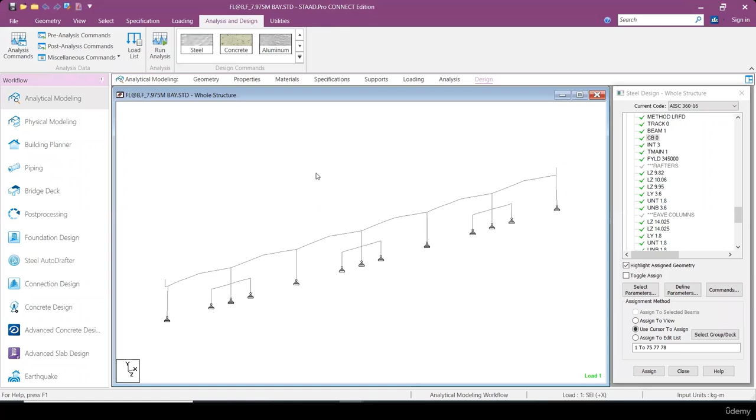Okay, so I'll start the session today. I'm sharing my screen. Just give me a minute. Okay. Fine. My screen is visible to all of you? Yes, sir. Okay, fine. Thank you.

So I'm creating a new structure. Let us take a rigid frame. Whatever the concepts, deflection criteria, effective lengths, design parameters, everything I'll use here and explain one by one. So I'm creating a new structure with the name rigid frame. Let me open one drawing also.

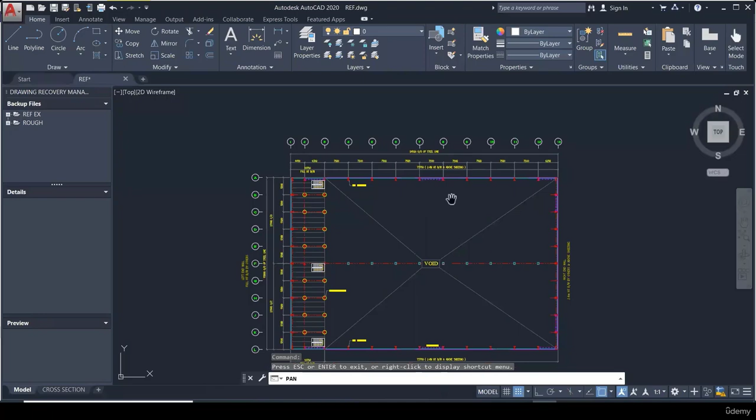One mezzanine is there. Since it is the first frame design, we are doing simple frame design only, so I'm not taking the mezzanine into account in this session. I am taking just a simple frame like this. Suppose we take an interior frame, the frame along grid line 8. That I have to design now.

So what is the type of frame? Can anyone tell? We have already seen different types of structures, and my plan is in front of you. So what is the type of structure here? Can anyone guess?

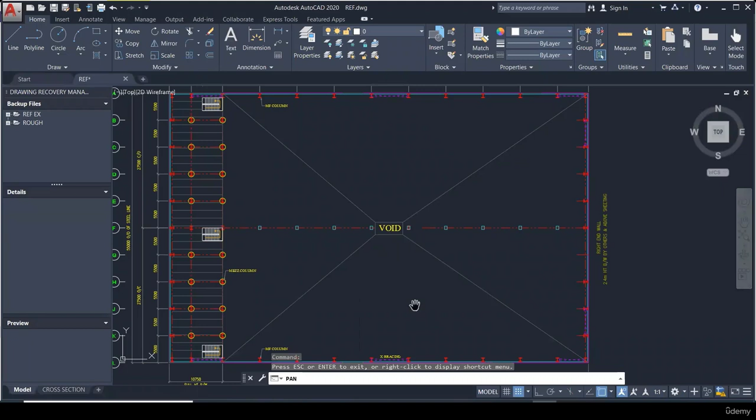One column here, one column here, one column here. So what is the type of frame this one? Already we have seen different types of frames. So can anyone guess? Dome structure. Sorry? No. Dome. Pitched roof. Yeah, obviously most of the PEBs are pitched roof buildings only. Okay, we cannot tell that by seeing the plan what type of structure it is.

No, actually, I am asking technically whether it is a rigid frame or beam column, like BC1 or BC2 or something. Yeah, type of frame I'm asking like that. BC1, sir. Yes, exactly. Perfect. This is BC1 because if you see there is one internal column here. So these two are mainframe columns, either sides, along this line and along this line. These are called mainframe columns.

There is only one internal column. Along one frame line, there is only one internal column. So this is called BC1 frame, beam column frame 1. This is the type of frame. So I'm taking a frame at grid line 8. Sir? Yeah, tell me. BC1 or MS1 are similar? No. Generally multi-span, if you see, you cannot tell by seeing this.

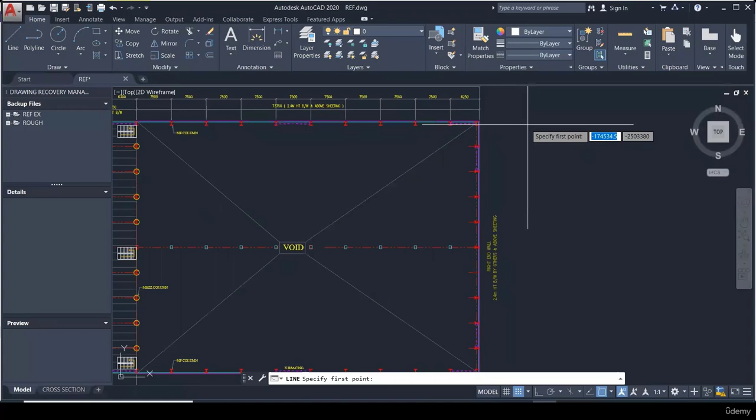Multi-span is a structure with multiple gables. Gable is nothing but a triangular portion. Let me take one line here so that you people can understand. So my BC column frame will be like this. The top of the BC frame will look like this. One column will be in between them, right? At this portion, one column is there. But if you go to multi-span,

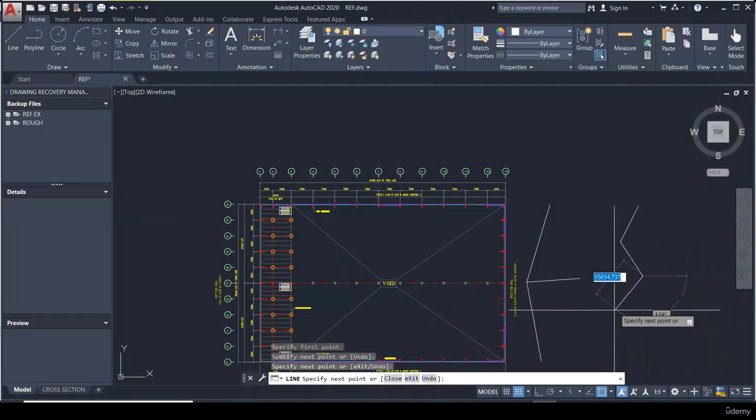it comes like this. Two gables. Multi-span or multi-gable are same? Yeah, multi-span or multi-gable are similar. Some companies will follow some terminology, depending upon the company. Generally the perfect terminology is that if there are multiple gables, the structure can be called multi-span. If there is only one gable and there are a number of columns, that is called BC frames.

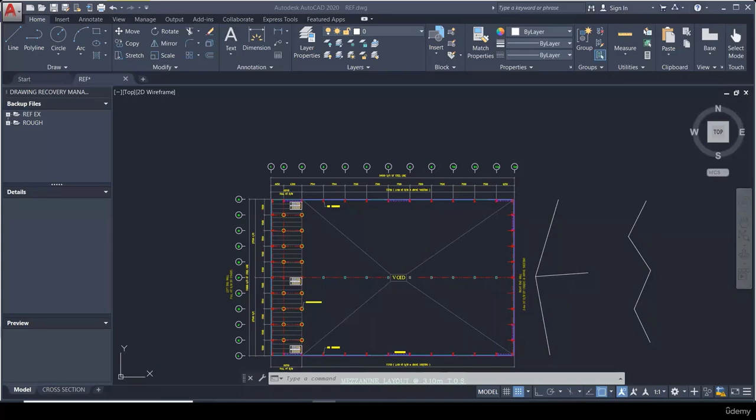Okay, fine. So I am taking grid line 8 as a BC column frame 1. So what is the width of this building? 55-meter width. And one more important thing: what is the tributary of this frame? Suppose I am taking grid line 8. What is the tributary, or bay width? 7.5. Yes, exactly. Perfect. Why is it 7.5?

This is the frame line we are talking about, right? I'll highlight it. So it will take half portion of length from this, half portion of length from this. Half of 7.5 goes to grid line 8, half of 7.5 goes to grid line 8. So half plus half comes to the full 7.5. So the bay width or load width or tributary of grid line 8 will be 7.5. Anyone have doubt in this?

No, sir. Tributary is the main concept while applying loads. If you take a lesser tributary, you'll get a lesser weight of frame. Obviously, if the tributary is more in practice, the frame is going to fail. So that is why tributary is the main portion while applying the loads. So the bay spacing, just tell me.

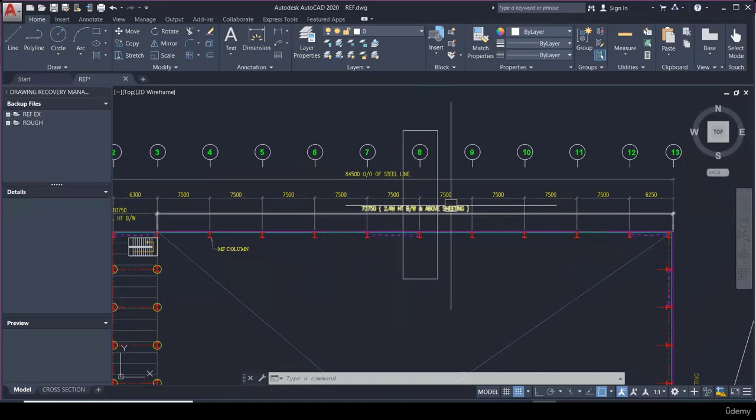Here it is 7.5 same, but suppose let us take this frame along grid line 3. Along grid line 3, one side bay spacing is 6.3, other side is 7.5. So you have to take the average width: 6.3 plus 7.5 by 2. Nothing but half of value from 6.3, half of value from 7.5.

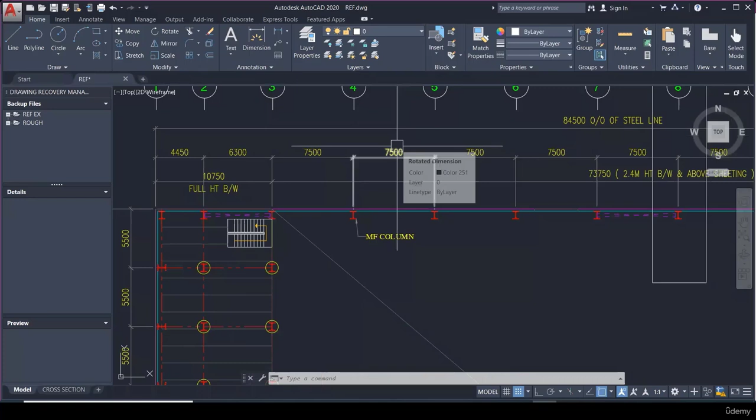And the question you asked is, if there are multiple changes in bay spacings, what value we have to take. If you have time, you can do one frame by one frame. It's your wish. But if you do not have much time to do each and every frame separately, you can take the higher value tributary frame and apply it to all frames. Is your doubt clear?

Yes, sir. Okay, if you have time, you can do each and every frame separately by taking the individual bay widths. But if you don't have much time and suppose your client is pressurizing you, you can take the higher side and apply it to all frames, but that will be uneconomical.

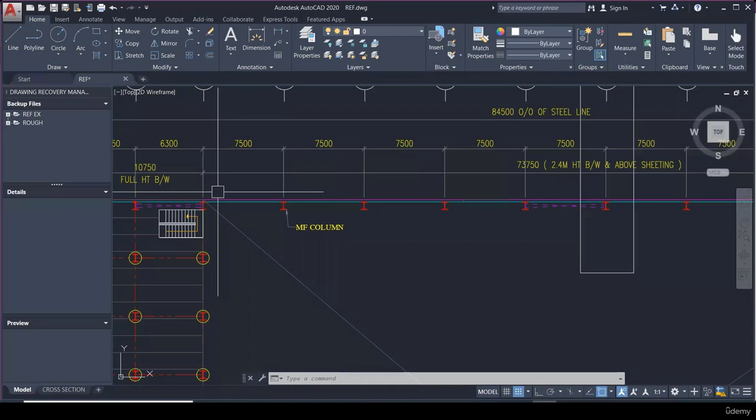Suppose here the frame width, the tributary is 7.5. Here obviously it is 6.7 or 6.9, something like that, right? So there is some difference, 7.5 and 6.9, almost half a meter difference in tributary. So loads will be less in this frame. That is why if you do typical to all frames, sometimes it will be uneconomical. So if you have time, better to go with individual frames.

Okay. So I'm taking grid line 8. Average tributary is 7.5 plus 7.5 divided by 2. That will give you the average tributary as 7.5. So I'm just mentioning here as a reference only. Just 7.5 meter bay. Rigid frame underscore 7.5 meter bay width.

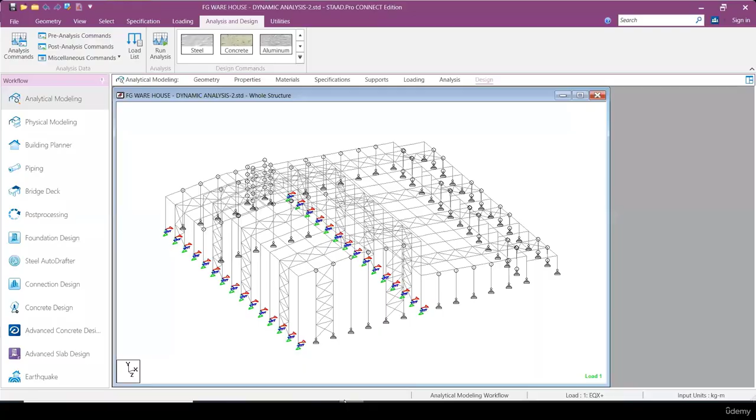Okay. So please check whether it is in English units or metric units. Whichever is feasible to you, you can follow like that. Generally we follow metric units only. So I'm creating the structure. Sorry, it has been closed.

I'm advising all of you, please use the licensed version if possible, because these are cracked versions. These cracked versions show some negative results while analyzing the structure, because some structures may pass in licensed versions, but these structures may fail in cracked versions. So please be aware while using cracked versions. It is better to use the licensed version only if possible.

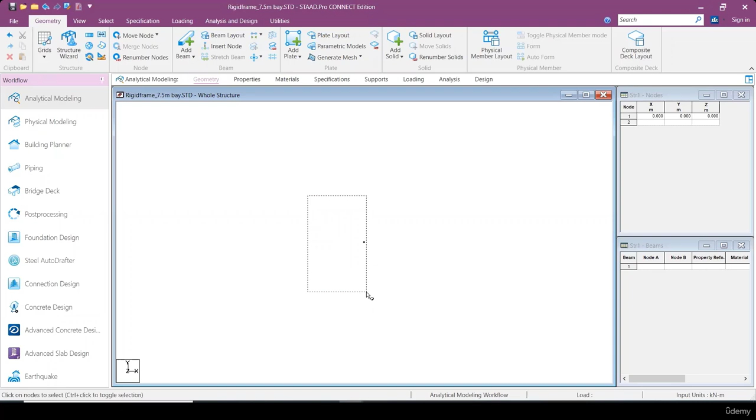So I have created a structure. I'm creating an initial node at origin. I'm taking front view as reference because I'm doing a 2D frame only. We have to increase our learning step by step. Already we have done beams. We are doing now frames, and then we'll see space frames. Like that we'll increase our standards.

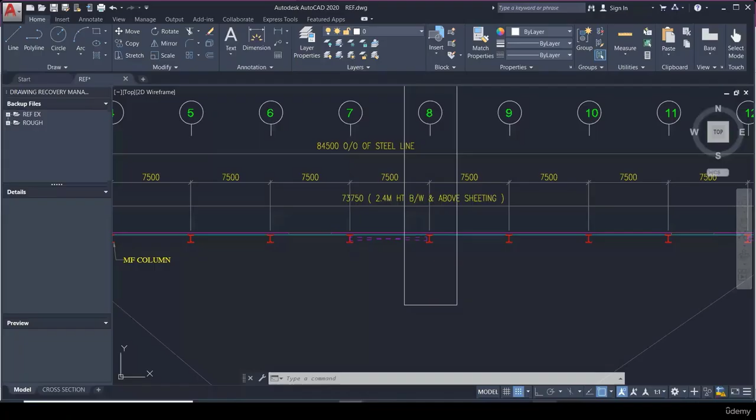So first let me copy this node to some width. What is the width of the building here? The frame is in this direction, right? So what is the width of the frame? You can see it is 55 meter. But in this 55 meter, 200 will be taken by block wall on either side. Generally STAAD will take center to center dimensions only. That is the main point you have to understand. So while giving the width in STAAD, you have to give center of this column to center of this column. That is why the overall width is 55, but we should not give 55 in STAAD.

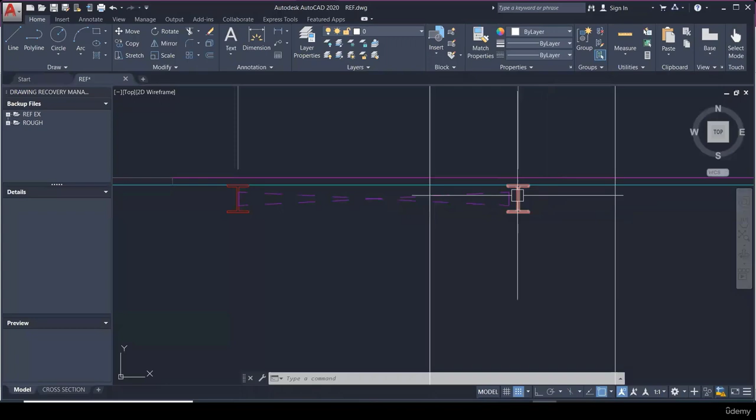Because the 200 block wall is going on both sides, while giving the center line, you have to give your assumption. Suppose the base depth of the column is 300 mm. So I have to neglect 0.15, because I have to give it at the center line in STAAD. So 200 plus 150, 350 on one side. This side also 200 block wall plus, assuming 300 overall depth of column at base plate, the center line will be 150. So 200 plus 150, 350. So 350 on both sides.

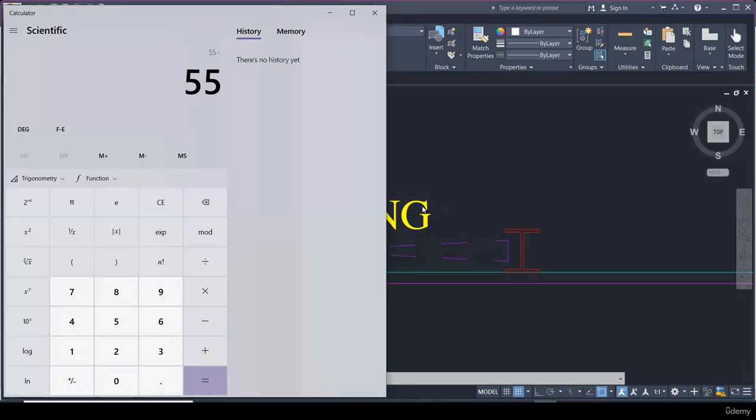So 55 minus 2 into 0.35. So how much do we have to take in STAAD? 54.3 only. All of you agree with me? Yes, sir. Clear. So I'm giving 54.3 only in the x direction.

Sir, I have a doubt. Yes, tell me. Sir, for this column I have assumed the depth is 300. Sometimes its depth is more than 400, 450 like this. Yeah, probably it may go. You have to shift this point after the design if you want. No problem at all. After the design, if your design has passed, and if there is any change, you can shift this node to whatever the actual dimension is.

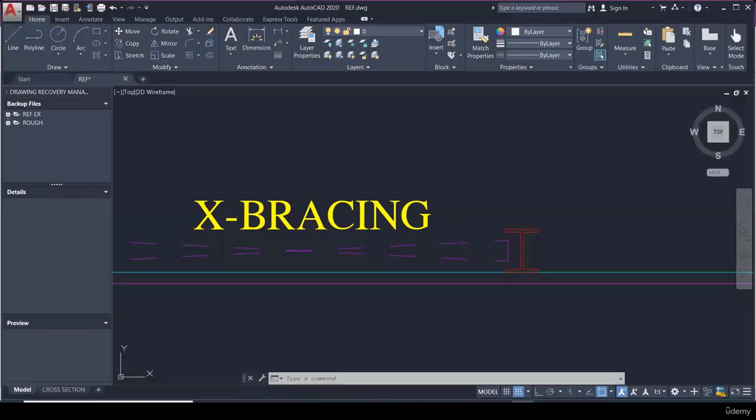Okay. So these two are sidewall columns. I have one middle column also here. This is the column, at half distance. So actually 55 by 2, if we take the middle of these two columns. But I am taking here 54.3 by 2, right? So 54.3 divided by 2 is 27.15.

27.15. So these two are mainframe nodes for mainframe columns, and this node is for the BC column. So we have created nodes at the base. Now we have to project columns and then rafters. So what is the height of the building? For that, I'm going to take the cross section.

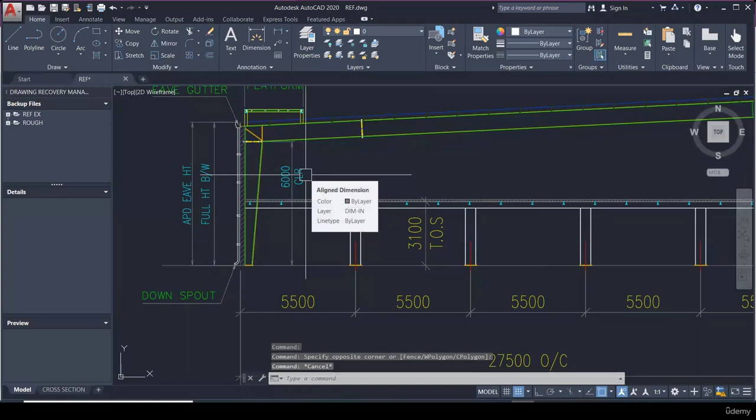Okay, so this is the cross section. In my project they have given it as 6 meter clear. Sometimes the customer will give clear height, sometimes the customer will give eave height. Eave height is nothing but the top of the eave strut. This is the C section you are seeing, right? I have highlighted it here. This is called the eave strut. The bottom of base plate level to top of eave strut can be called the eave height.

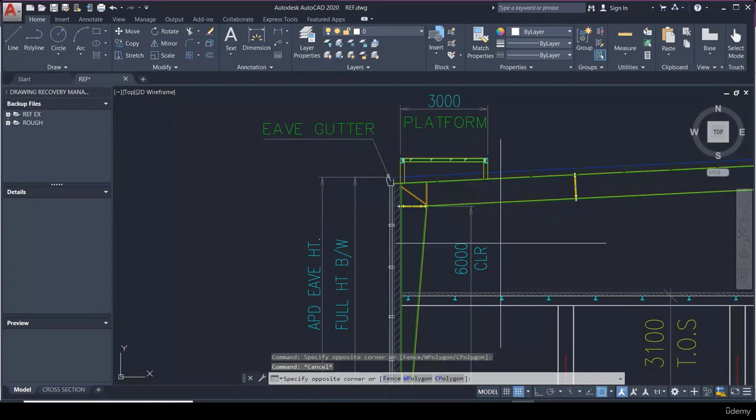Sometimes the customer will give eave height, sometimes they will provide clear height: I need this clear height, whatever the eave height will be, he has no problem. Some customers will be like that. In my project, he has given 6 meter clear. So 6 meter clear plus, I'm again telling you, STAAD takes center lines only. So you have to give trial dimensions of the columns and beams on a trial and error basis. All these you have to assume first.

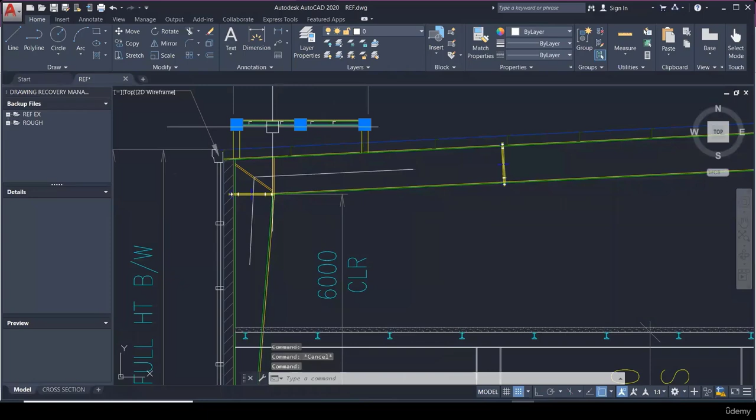So suppose he wants this 6 meter clear. This is the rafter. STAAD will take the center line like this. I will draw the center line like this. So this is the depth you need now. What is the module width here? 27.5. Let us assume my rafter depth is 800 mm. So the center line will be at 400. So 6000 plus 400, 6.4 you need to take. So on both sides I am taking 6.4 height.

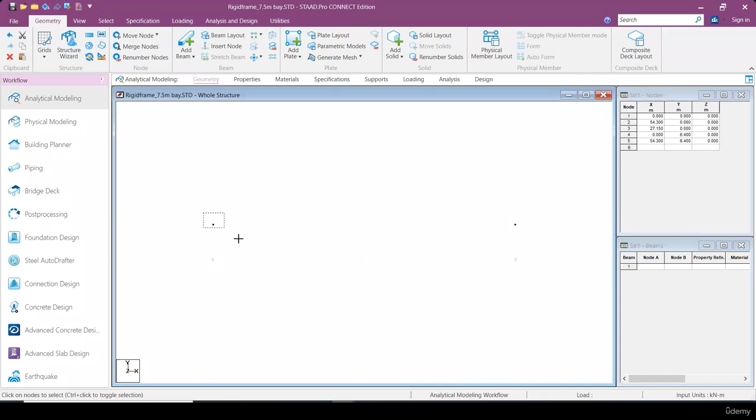I'm just using Control C and Control V to create nodes. Copy and paste. Okay, so I have created the haunch portions here. Now I am going to take the ridge. Suppose here the slope, let us take 1 in 10. Suppose the customer has given the roof slope as 1 in 10.

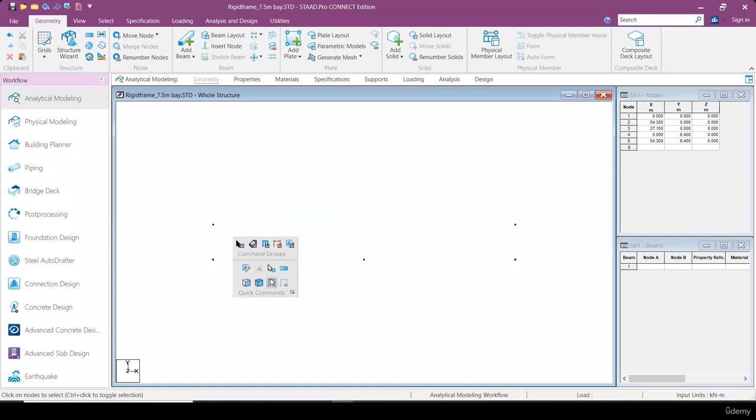So what is the distance here? And the ridge is symmetrical. All these are assumptions, because I'm telling you an example. So 27.15 and the roof slope is 1 in 10. So what will the rise be? The horizontal distance is 27.15 meters and the roof slope the customer has given is 1 in 10, or you can say 10% slope, if you are easier with percentages. 2.715. Yes, 2715 mm or 2.715 meters.

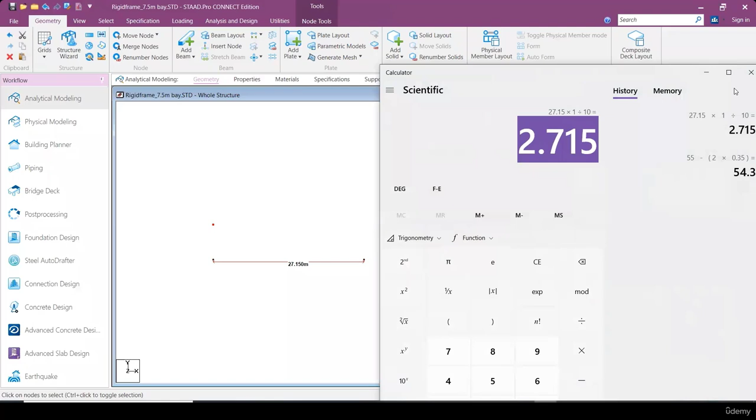So the horizontal distance is 27.15, the vertical rise will be 2.715. Some of you may have a doubt, I'm just telling you how to calculate it. 27.15 is the horizontal distance and the customer is giving 1 in 10 roof slope. 27.15 into 1 by 10, if you do like this, you'll get the rise. Rise is nothing but eave to peak. 2.715. So thus I have created a node at the ridge. I'm just connecting all these beams.

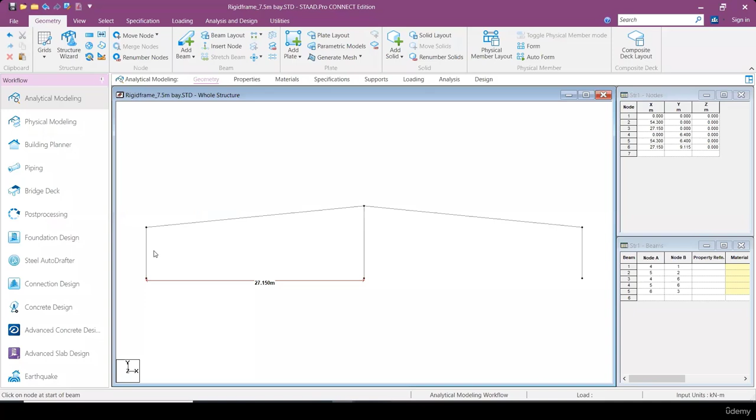Okay, so clear. The next thing, for better optimization, every company will provide you one guideline: if the column or rafter is more than 3 meters, you can divide it into segments. A segment means there will be no splice, but they can connect different sections by welding. Suppose we do a taper here: the outside will be flat and the inside will be tapered like this, right?

So you can take one segment. If you take one connection here, there will be one section on the top and one section on the bottom. So for better optimization, you can change thicknesses for the top segment and for the bottom segment. The company will guide you what to do for better optimization.

So what we will do is, what is the length of this one? 6.4, right? So it is more than 6 meters. I can divide this entire column into 2 segments, because each segment should be at least 3 meters. So I'm dividing this column into 2 segments using the insert node feature. These options I am hiding.

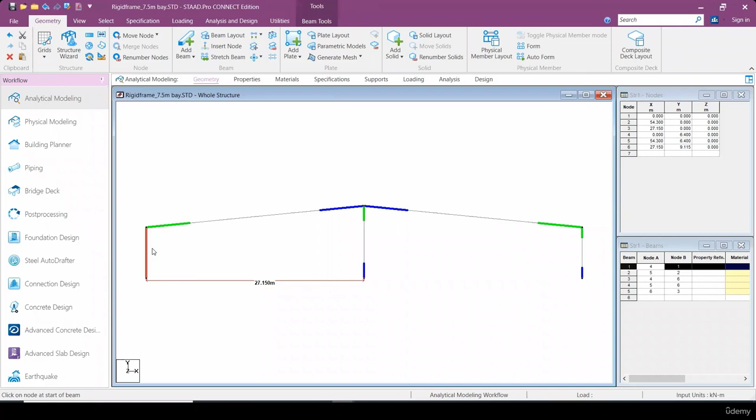Yeah, it is clear. So I have to select the column and there is one option, insert node. So before going to the insert node, what is the start point and end point? If you click Shift E anywhere in the UI, it will show you green and blue colors for each beam. The green color indicates starting and blue color indicates ending of the particular beam. So I have to select the column and I have to click the insert node option.

And what is the distance I'm going to take? I'm taking a segment at 3 meters from the top. I'm adding a new point. If I click OK, you can see here one beam becomes 2 beams. Generally in STAAD, all these will be called beams only, because if you see here, beam, beam layout, add beam option, everything is called a beam in STAAD itself, because it does not know what is a column, it does not know what is a beam. So that is why I'm calling this a beam also.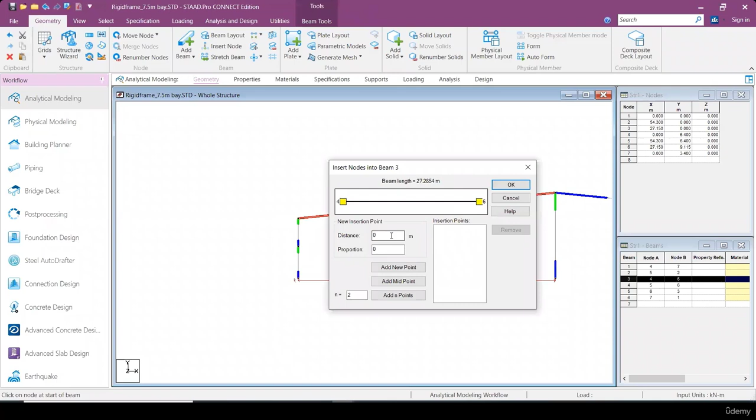So I have divided the entire column into 2 segments, and this also I'm dividing into a number of segments by using the insert node option. The actual length of the beam from eave to peak is, here it is showing, 27.2854. So I'm dividing segments at each 3 meter portion: 3, 6, 9, 12, 15, 18, 21, and then 24.

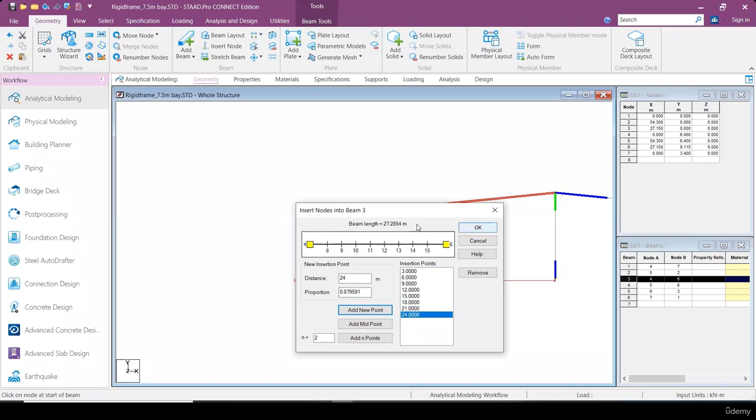Up to 24 only I can do, because the beam length is 27. 24 plus 3 becomes 27, so I cannot give it 27 meters. Sorry, overall beam length is 27 meters. So if you see here, a number of segments are created.

What is the use of segments? If you do not segment the column, you have to give only one thickness, one flange thickness, for the entire column. Suppose our flange thickness is 10 millimeters, you have to give it to the entire column. But PEB is well known for optimization techniques. That is why you can change the thicknesses for the top segment and bottom segment. So for that purpose, I am doing it segment wise.

Be careful while doing segments. Be careful with the unsupported lengths. What unsupported lengths are and how to use them, I'll tell you while doing it. While doing segments, this is the most complex portion. If you forget to give any unsupported length for this column, that may cause you problems. How it will cause them, I will tell you. So I'm again clicking Shift E so that the start and ending points disappear.

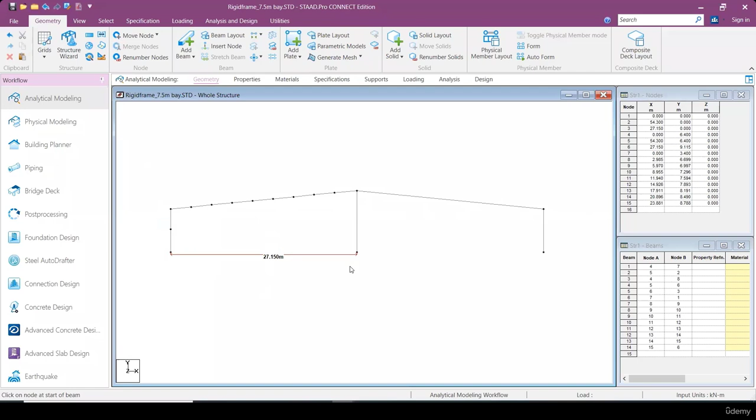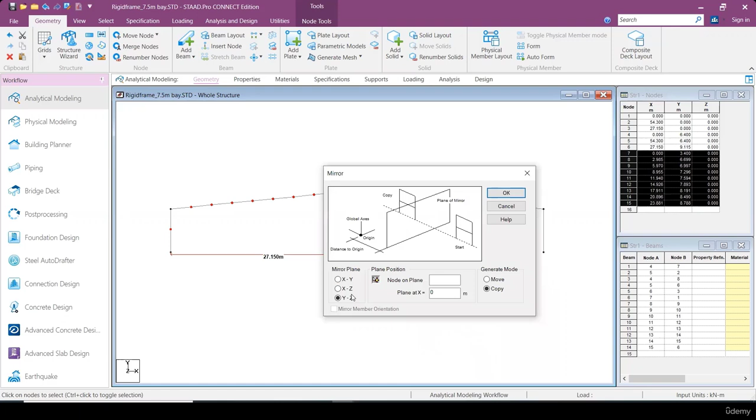If you see here, this is a symmetrical portion, so the left side can be mirrored to the other side. So I'm selecting the nodes by using the node cursor. Whatever I have done on the left side, I am selecting those nodes, and there is one option, mirror. Mirror about which plane? YZ plane. This is the YZ plane. So select YZ plane and plane position node, which node you want to mirror about. I'm just taking this node.

You can take this node also, because any node on the YZ plane can be taken as a reference for mirroring. So I'm taking this node. If I click OK, if you observe, all these nodes are created on the right side also. Whatever you have done on the left side will be mirrored to the right side portion like this. So you can do it directly like this.

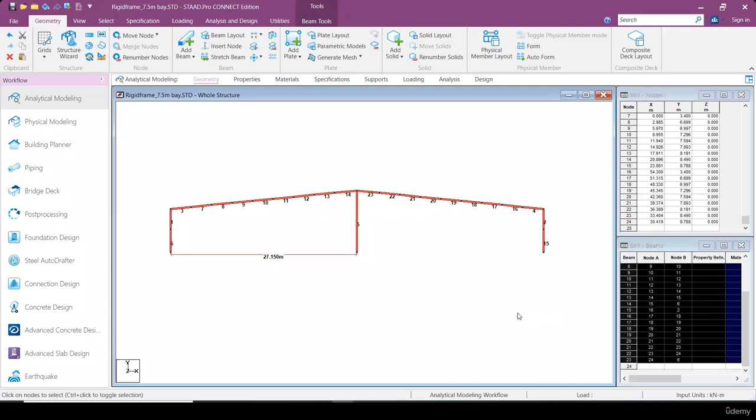If you click Shift B, beam numbers. Shift B means beam numbers. So if you see here, 1, 6, 2, 15, 3, 7, 8, 9, 10, 11, 12, 13, 14, 20, and all these are not in order. If you want to make them in order, you can delete all these beams, and it is asking: deleting beams has left some nodes with no structural element, do you want to delete these nodes? No, I don't want to delete the nodes. I want the nodes to be here.

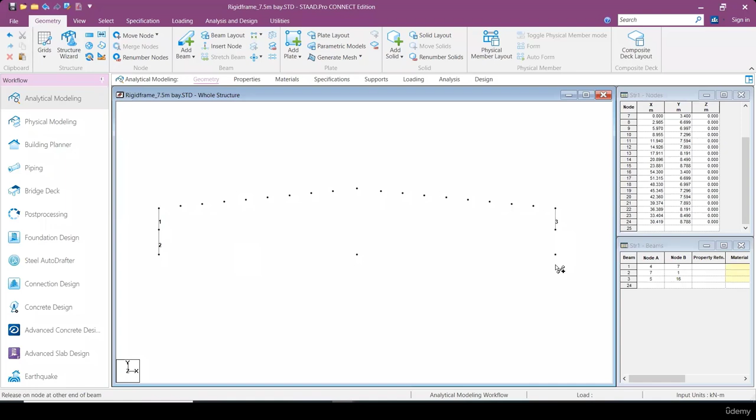So I'm adding them as per my order, because I know the order. It will be easier if you give beams in order. If you observe here, it is 1, it is 2, all the columns will be directly in order. 3, 4, and this column is 5. 6, 7, 8, 9, 10, 11, 12, 13, and 14. This time I'm giving from this side 15, 16, 17, 18,

19, 20, 21, 22, 23. So what does this mean? Overall 23 segments make a frame, a BC1 frame here.

So now all the geometry has been set. All the nodes have been created, all the beams have been done in a particular order which we want. If you want, you can do like this: all the beams can be started with one, and after that you can do columns. You can do as your wish. This is my favorite order, that's why I have done it like this. Whichever order you like, you can do.

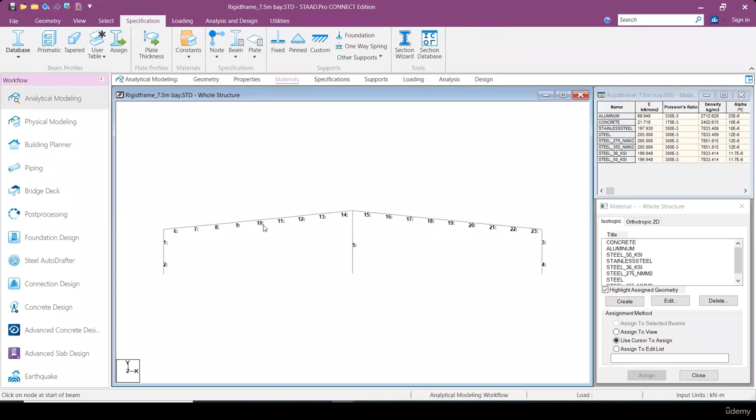Properties, materials, all these will be done in the STAAD editor. Material, as I told you, is constant because we are doing steel structures only, so I'm assigning material here itself. Assign to view. If I click assign, all the beams will be assigned with steel material. So up to this, everyone is clear? This is how to create a geometry for a frame in STAAD.

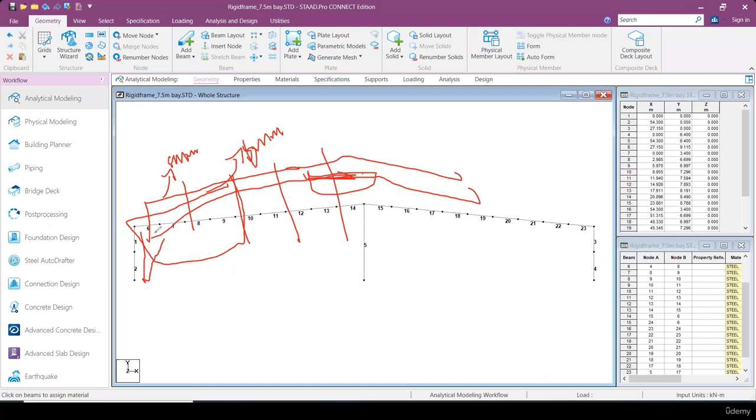And 9 and 12 are multiples of 3. That is why I am dividing the entire member into 3 meter segments. Some countries may follow a 9 meter maximum transportable length, some 12 meters. That is why I am taking the entire rafter and column into 3 meter segments. It depends upon transportable length. Yeah, exactly. And the advantage is that you can get an economical section. Fine.

So I'm going to the STAAD editor. After this portion, I'm just saving my structure.

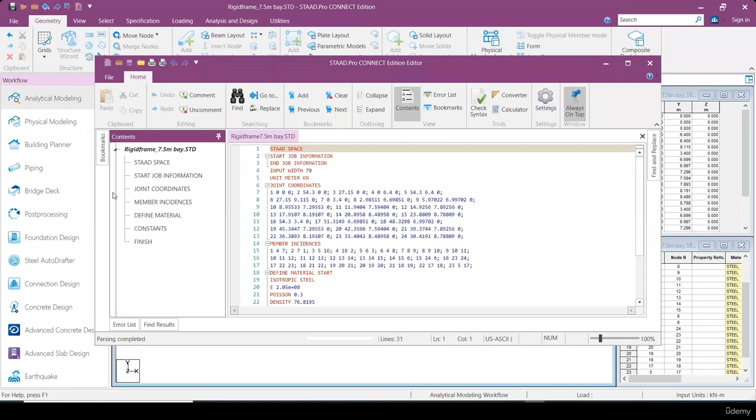So this is how the STAAD editor looks, which we have seen in the last beam design session also. These are the joints or nodes we have created at some particular points. These are beam incidences. The first beam is connected between the 4th node and the 7th node.

If you click here, Shift N. So this is the first beam, right? It is connected between 4 and 7. So that is what it is showing here. 1 is in between the 4th node and 7th node. The second beam is in between the 7th node and 1st node. Like that, it has created beam incidences for all the structure.

And we have created a material, because all these properties are predefined: Poisson's ratio, elastic modulus, density, alpha, which is nothing but the thermal coefficient, and damping coefficient. All these are predefined parameters. That is why I have created a material property in the UI itself. And then end define material; after that I'm going to give properties for each and every segment.

So before that, for my convenience, I'm giving the units in mm. Just give me a minute, I'm taking the node numbers off here. Okay, so what are the units here? Predefined units, meter kilonewton. But if you follow meter kilonewton, you have to give decimal points, right? 0.4 or 0.8 or 0.3, like that. For my convenience, I'm changing the units.

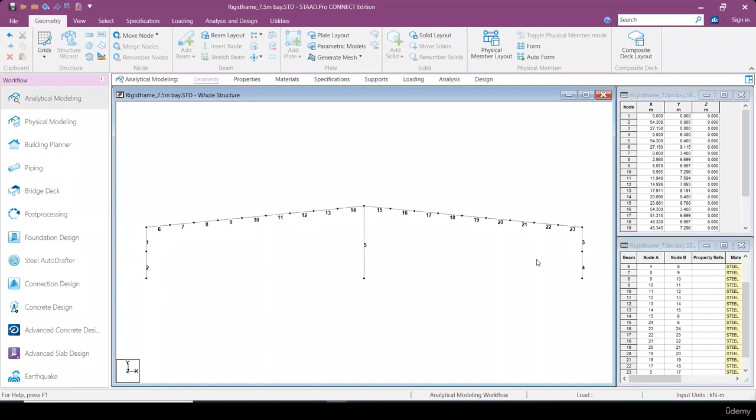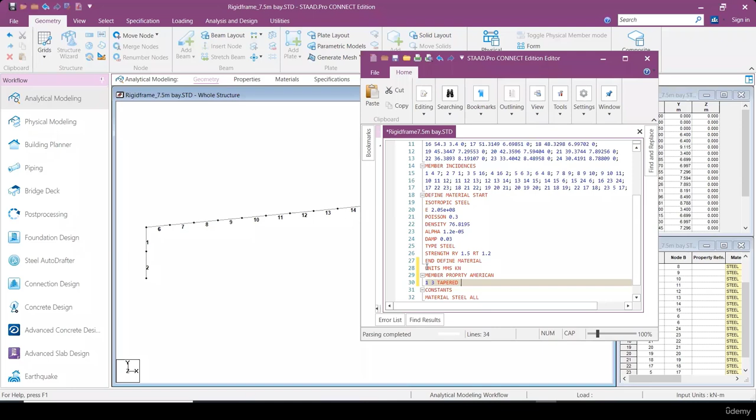So 1 and 3 have the same properties. So 1, 3 space. I told you in the last class what the syntax is here. Tapered. The I section is tapered. Tapered means you can provide different depths at the start and end point of a particular segment or beam. I'm clicking Shift E again. If you see beam 1, it has its starting point at the top and ending point at the bottom. So for 1, 3 tapered, the starting point should be the haunch portion, right?

This is the haunch portion, so I'm giving a higher depth. Let us take 800 mm. Including the thickness of flange, I can take 8 mm flange thickness on both sides. So 816: the outside flange thickness is 8 mm, the inside flange thickness is 8 mm, the web depth is 800. 8 plus 800 plus 8, the overall depth gives you 816.

Let us take the web thickness as 8 mm. You can take as you wish; this is all trial and error. You have to give some particular section and check whether it is passing or not. If it passes, okay. If it is failing, you have to change the section until it passes. If any section passes heavily, you have to change it to an economical section, reduce the section. Like that we will do in this session.

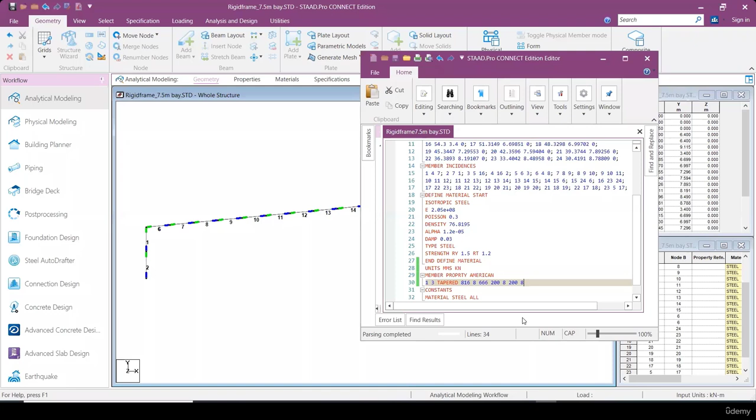So 816, then 666, because I'm taking the depth as 650 at that portion. 650 plus 8 mm outside flange, 8 mm inside flange: 650 plus 8 plus 8, 666. 200 mm outside flange width, 8 mm outside flange thickness, 200 mm inside flange width, 8 mm inside flange thickness. So, do you guys have any doubt in this syntax? How it is written: tapered 816, 8, 666, 200, 8, 200, 8. Is it clear to all of you?

Yes, sir. If you don't mind, repeat again this taper. Sure. Okay. If you see here, 1 and 3 are symmetrical, right? So I'm using the same property for symmetrical segments 1 and 3. These are beam numbers. 1 and 3 are beam numbers. I'll zoom in for you so you can see. Is it clear to you?

Okay, 1 and 3. Tapered means this is the prismatic section property we use for properties of I section. So tapered is the syntax, and then 816. If you see here, the green color portion is the starting point of the first beam, and the blue color portion is the ending point of the first beam. So obviously in the PEB building there will be more.

Okay, just before that, I'm doing this building with a pinned base. A pinned base will have negligible moment at the bottom and maximum moment at the top of the column, right? So you have to provide the maximum section at the top of the column. This is the green color portion where you have to provide the maximum section.

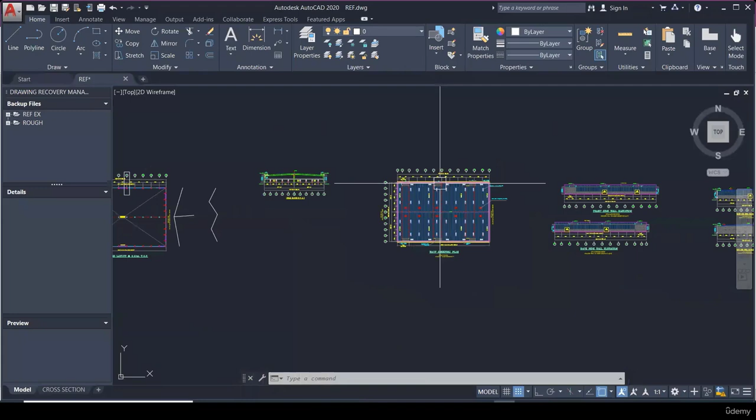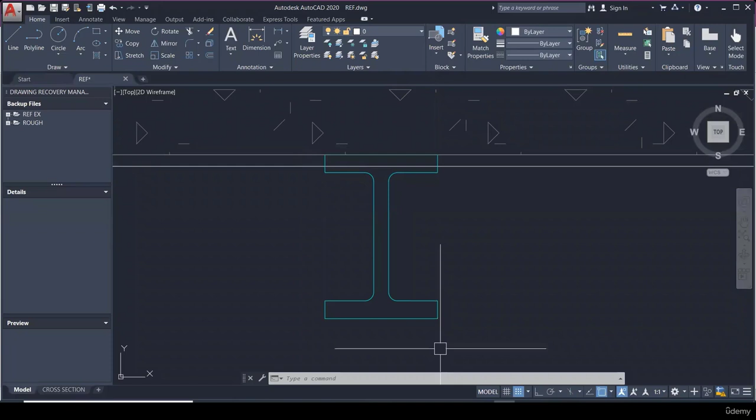8 mm outside flange. If you still have doubt, I'll draw an example. Suppose this is the I section. This web depth I have taken as 800 mm. The outside flange thickness is 8 mm, the inside flange thickness is 8 mm. So 800 plus 8 plus 8, the overall depth of the section will be 816.

Okay, 816. The next syntax is the thickness of the web. This is the thickness of the web, which I have assumed as 8 mm. Then the second depth, or end depth, of the beam. This blue color portion you are seeing for beam number 1 is the end depth, which I have taken as 650. Again, outside 8, inside 8. 650 plus 8 plus 8 gives you 666.

And 200 by 8 for the outer flange; you can observe it in the drawing. This width is 200, this thickness is 8. Inside also, this width is 200 and thickness 8. That's how I have taken this syntax. Starting depth, ending depth, in between the two depths the web thickness, and the remaining portion outside flange and inside flange: 200 by 8 flange plates. Is it clear now?

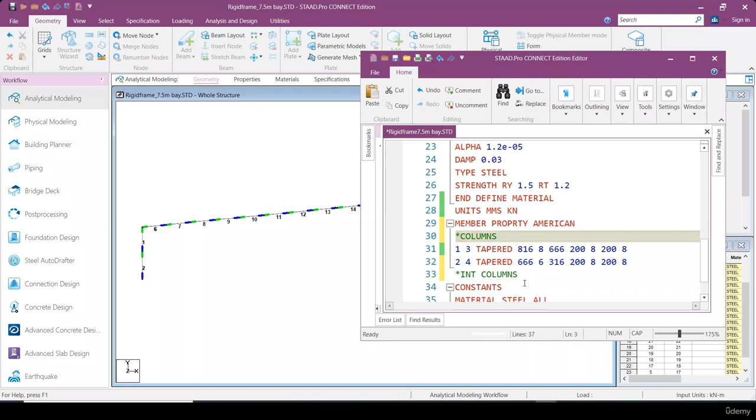I have mainframe columns, I can say main columns, completed. Now the internal column is there. I have to give a section for the internal column. So only one portion is there, only one segment is there. What is the member number? It is 5. And again section tapered.

Let us assume the depth. All these are assumptions, right? All the designs start with an assumption. If it passes, okay, otherwise you have to change. So the depth of the web is 400 for this one. Again I can take 8 mm inside and 8 mm outside, so that gives you 416.

Generally for internal columns we will not provide tapered. Please be clear that we will not provide tapered columns for internal columns. We will provide straight sections only. 416, 416, 208, 208. One thing I want to tell you again: if the outside flange and inside flanges are the same, no need to give outside flanges. It will take 200 by 8 for both automatically.

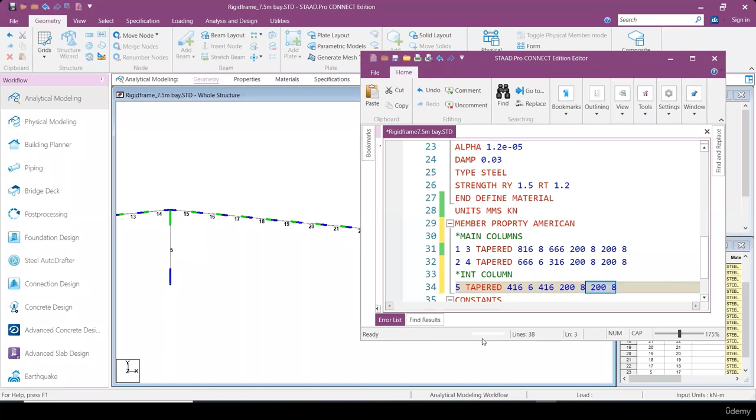No need to give 2 times. If you give also, no problem, but there is no meaning, because anyway we are giving a straight section. We should not change the thicknesses on both sides because it will be symmetrical. The thickness on the left side will be the same as on the right side. So that is why I'm not giving 2 flange plates here.

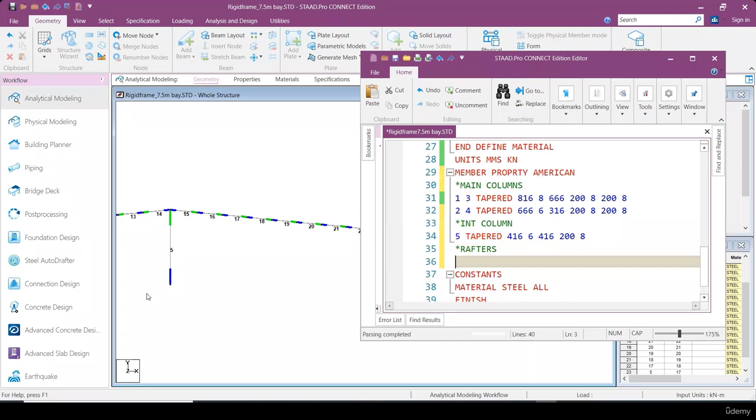And I have completed columns here. I'm going to take rafter sections. So 6 and 23 will have the same section because this is symmetrical. 6, 23, tapered. Remember what I assumed for the clear height? They have given 6 meter clear, and I have taken 6.4 for the center line in the STAAD. So I have assumed the rafter depth as 800 mm. So accurately, I can give 816.

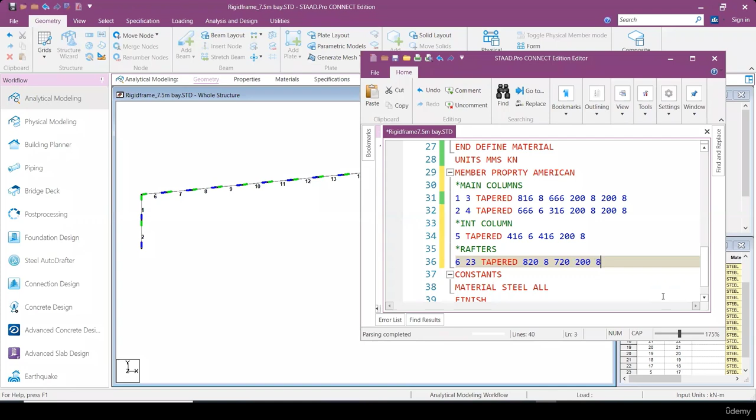I'm assuming top and bottom thickness as 8, or otherwise you can assume 820 with top and bottom thickness 10 and 10. 820, 8, 720, because I'm tapering here. 720, 208. The next is 7, and the member before 23 is 22. 7 and 22, tapered. The previous one started with 820 and ended with 720, so the next member should start with 720 again.

720, and suppose this ends at 620. 208. Sorry, I have assumed 10 mm, right? You can give top and bottom thicknesses differently if you want. But for the time being, for the practice, I have taken the same. You can change if you want.

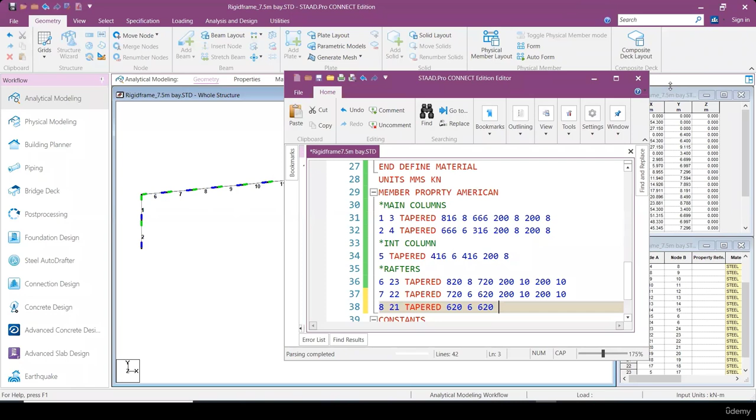Upper 620, 620. I'm giving the straight section because the width is more here. If you reduce the section too much, the rafter may fail in deflection. So that's why I am giving the straight section from here, not much reducing the section. Just I'm copying all these things. So up to what number can I copy? Yeah, the interesting portion is here.

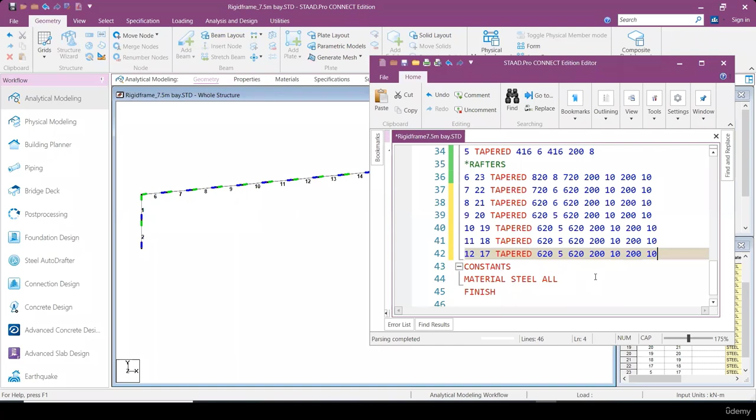Just 15 minutes before, I told you that we have to provide a flat bottom section in order to sit on the column properly. What is the roof slope here? 1 in 10 we have assumed. This member length is approximately 3.28 meters, and the slope is 1 in 10. You have to give a flat bottom. So what depth change do you have to make here? What end depth do you have to give? Can anyone guess?

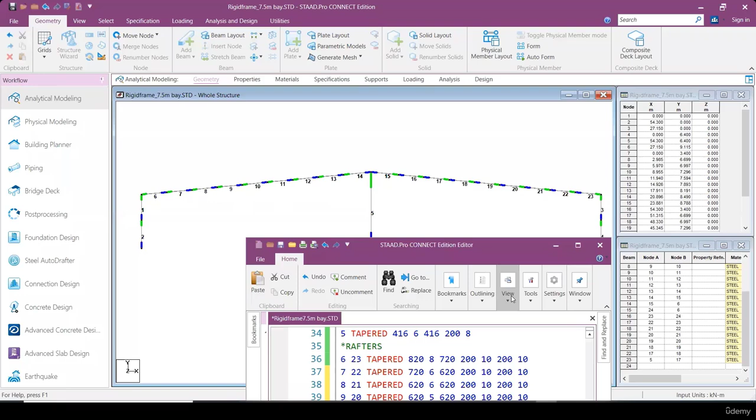Because I am following 600 depth up to member 16. You see here, one more line I am copying. 13, 16, control V. So I have maintained 600 depth up to this portion. So how much depth do I have to give here in order to get a flat bottom?

All these are geometrical calculations. Please be active to do this. Okay, simple, right? 900. Yeah, tell me. 900. Yes, exactly 900. Why is it 900?

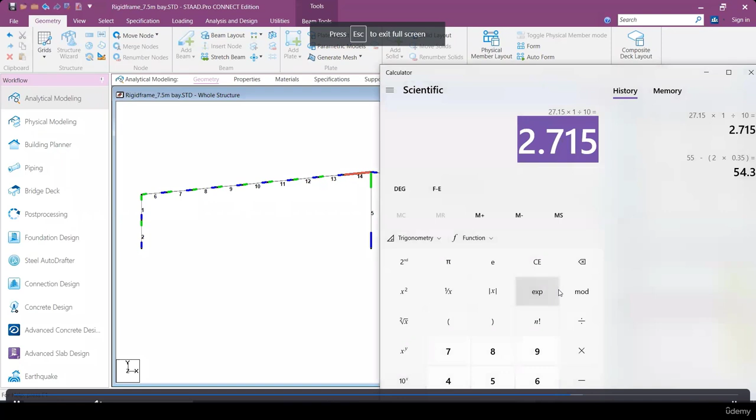Actually, here the member length is 3.28, but the 0.28 you can make negligible. The actual length is 3 meters, right? 3 meters for the 1 in 10 portion. If you do the calculation, 3 into 1 by 10, the depth you have to maintain on the other side is 300 mm, right?

In order to get the flat bottom. Already we have given 600 here. So in order to get the flat at this portion, you have to increase the depth by 300. So 600 plus 300 gives you 900. 14, 15, tapered, 620, 6, 920, 200. Sorry. Where is the starting and ending? 14 starting is 620. Yeah, 620 and ending is 920.

Okay, please be careful while giving the depths, whether it is starting or ending. Please be careful with this. This is the starting depth, this is the ending depth. Starting is 600, ending is 900. So that's why I have given 600 first and 900 next.

So everything has been completed up to material property. After that, it already has constants, material, steel, all these. And then again, you can change units to meter kilonewton. This is the default unit coming here. Actually, meter kilonewton is the default input unit, but I changed it for my convenience. So after my program ended, I changed units to meter kilonewtons again.

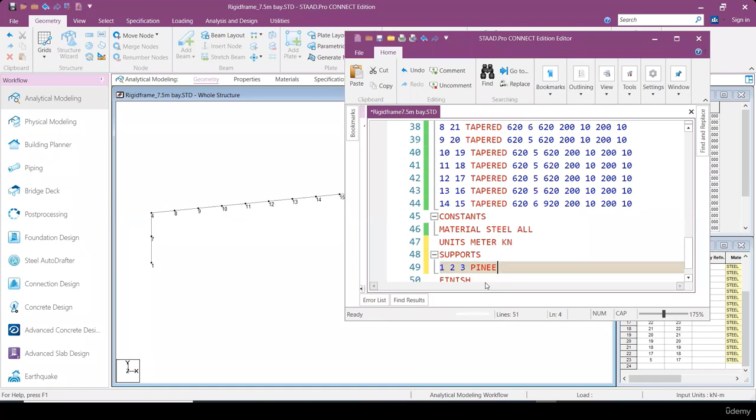So 1, 2, 3. What is the support I am giving? Pinned. So supports also I have given. The next section is you have to give loads. We are doing AISC design in this session, so that's why the complete loads will be given. Before going to that, one more portion I need to tell you.

So, what are the loads to be given? Generally I follow this order. You can follow your favorite order. I'm following the order which I'm writing here. First load, load 1, seismic in positive X direction. I'm doing a 2D frame only here, right?

In a 3D frame, seismic forces are lateral forces, so they act in the X direction or otherwise in the Z direction. But we are doing plane frames here, so there will not be any Z directional force, because it is a 2D frame. For the 2D frame, one more thing, you have to change STAAD SPACE to STAAD PLANE, like I told you in the last class.

Plane is nothing but 2D. It is for a 2D frame. If you give space, you can apply Z forces also. In this program, I'm not applying any Z forces, which is why I'm doing it as a plane frame. And the next, seismic in positive X, then load 2, seismic in negative X. Obviously, right?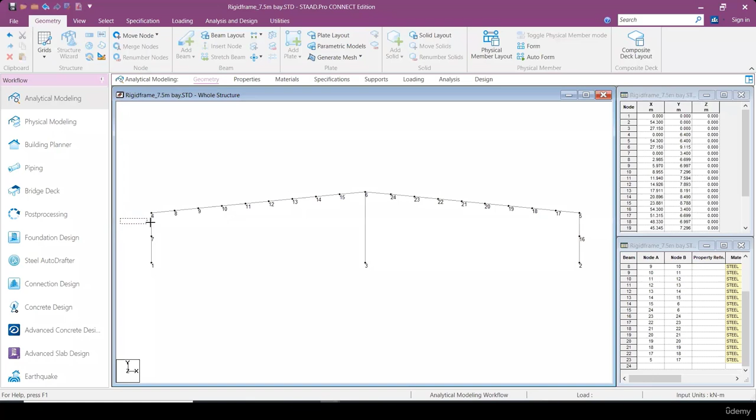If I take this structure, seismic forces will act in this direction and in this direction also. You cannot directly tell which direction it acts, because we can give only one direction in the plane frame. So whether it should be plus X or minus X, we cannot tell directly. So we have to apply both cases, plus X and minus X.

Load 3 will be dead load, and load 4 will be live load. All these you know, right? Load 5 will be collateral load, or some people call it additional dead load.

Okay, you can say it as collateral load or additional dead load. So what is dead load? Dead load is self weight of the structure, including sheeting, purlins, etc. So what is the live load? If any person goes over the structure for maintenance purpose, like that, any live load. Okay, what is the collateral load again? Collateral load we generally call additional dead load.

Additional dead load is nothing but some clients may want ceiling below the roof, because it is a steel building. They have to provide ceiling to reduce the thermal effect. Generally in summer season, there will be much more heat, right? So in houses also, you'll do ceiling to reduce the heat. Like that only in industrial buildings or warehouses, any PEB structure, some clients may want ceiling below the roof. Not only ceiling, any supporting structures below the roof come under additional dead load.

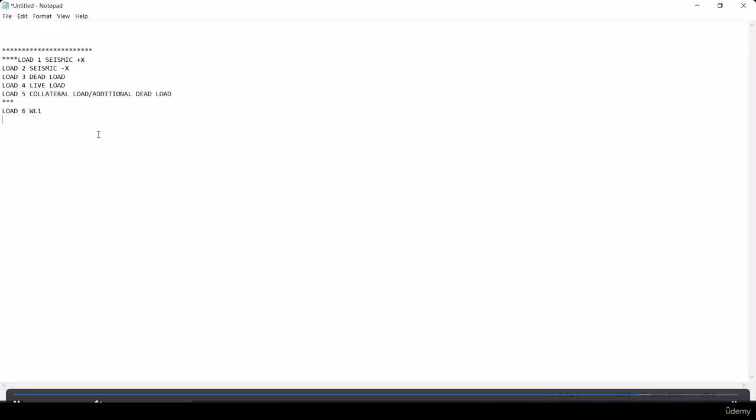Pressure case positive X, pressure case negative X, suction case positive X, suction case negative X, and longitudinal 1, longitudinal 2, right? Understood? Yes sir. So those are the 6 load cases we generally apply in the PEB. Some people will apply 8 load cases also. Nothing to worry about. But practically 6 load cases are sufficient.

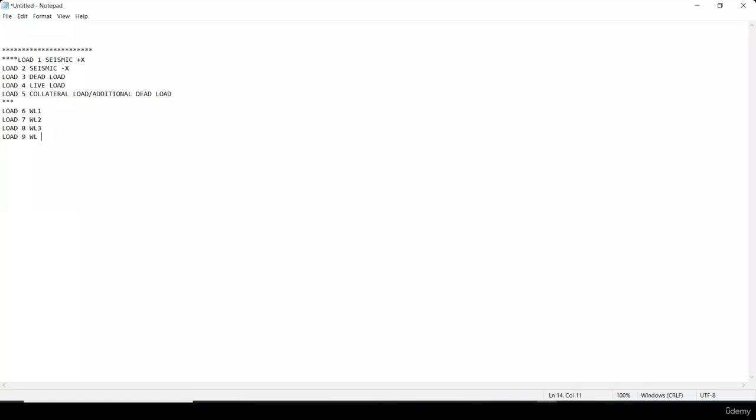Load 8, wind load 3, load 9, wind load 4, load 10, wind load 5, load 11, wind load 6. So first we have applied seismic forces, then gravity loads, and then wind forces. And the last thing, what remains here? Anyone guess please, because you are following the classes, right?

So temperature load. In the first class itself, I told you temperature load application on the steel is a must, because steel has the tendency to expand or contract according to the temperature changes. If there is an increase in temperature, the steel has a tendency to expand. If there is a decrease in temperature or below freezing, it has a tendency to contract. Those forces we generally call self-straining forces.

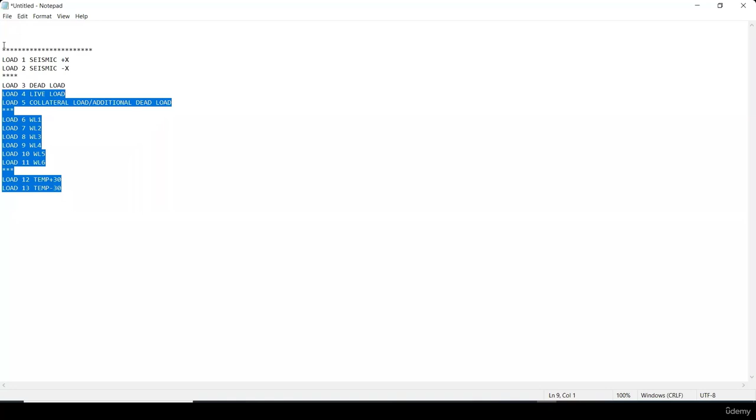Self-straining forces means we are not applying any forces on the structure externally. These forces will be applied by the structure itself due to temperature changes. This comes under behavior of the steel. So these are self-straining forces. Two cases: one is above room temperature, one is below room temperature. So these are the primary load cases, not loads, we generally apply in a steel structure. Clear? Up to this, all of you are clear, right?

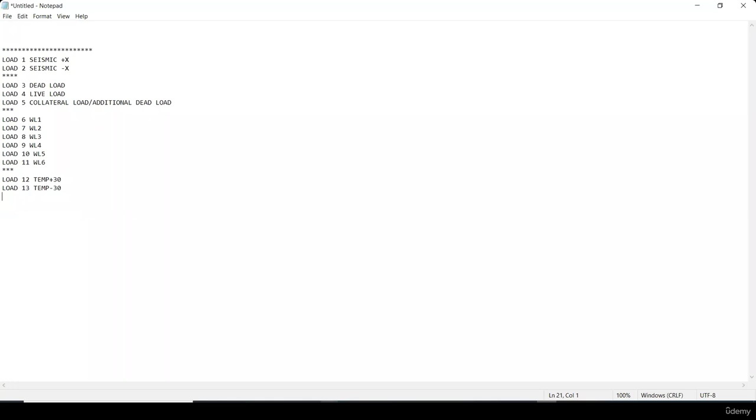Clear, sir. Okay, I think we have 10 more minutes, right? We cannot complete if we start. Yes, tell me. Sir, what about crane load? Any equipment load? I told you at the start of this session, we are not going to analyze the big structures directly. This is the sample structure. That's why I have taken a simple rigid frame as example. I'm going to increase the criticality over the length of time.

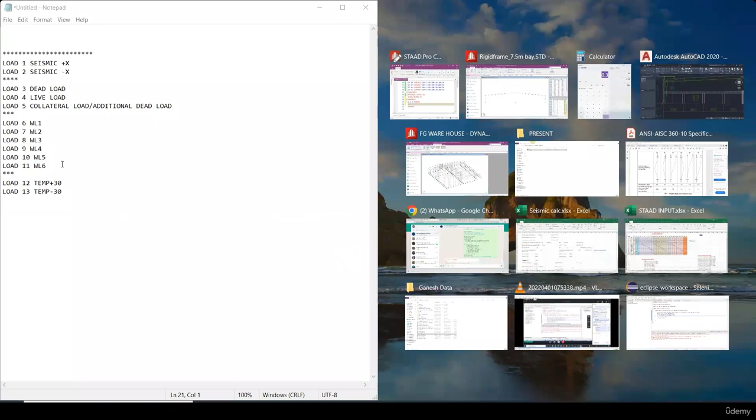This is a simple frame. In the next session or after, we will see mezzanine. After that, crane. After that, any other special structure like flat roof structure or truss structure. So like that, we'll increment the criticality. Clear? Because most of the people come under basics, right? That is why I'm going to take it from the basics. Don't worry, I'll cover the crane frames and crane beam also.

Generally, we'll do crane frame directly by use of brackets. So how to design a crane beam, which we generally call a runway beam. How to design a crane runway beam, that also I will cover. That is by using the moving loads concept. How to give moving loads while designing, I'll tell you.

So just 10 more minutes. If we start this loads concept, it is a much larger concept. It will take a lot of time applying here, and we don't have that much time today. So I want to stop here. Meanwhile, you can ask any doubts. Only if you practice can you understand all these things. If you come after the next session with fresh faces, you cannot understand, because I have taken syntax like this. There is a chance of forgetting this syntax if you do not practice tomorrow.

Like that. Okay, so I'm advising you to please practice all these types. Okay, not frames; just now I have started the frames. You can try the syntax on the beam. The syntax is the same anywhere, there is no change, right? You can try this syntax on the beam itself, and you can change the difference. You can change the types of sections. All these you can practice on your own.

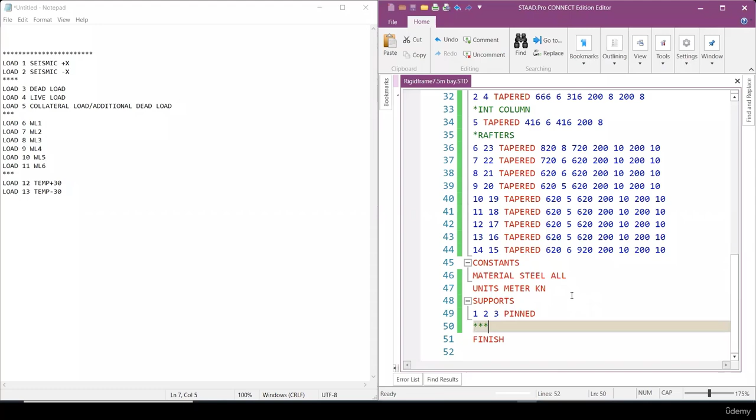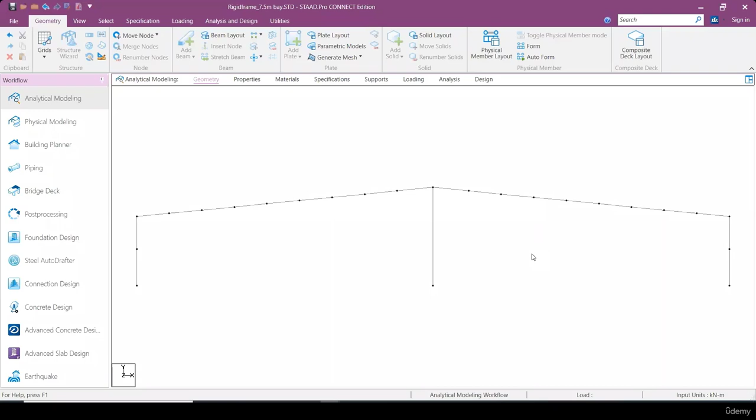Okay, sir. Sir, I have one question. Yes, tell me. Sir, please open the STAAD model. Yes, sir. How to check utility in this frame? How to check utility? Which utility do you want? Unity, sir. Actually, unity check ratios you want? Sorry, sir, I have not designed it yet. In other frames I have used it already, but in this one.

No, I'll tell you. No, not this one, it has not been completed yet. Do I have anything in this? Yeah, this has not been completed. So you'll get utility ratios only after designing. He's asking the doubt, that's why I'm telling him. Remaining persons, please don't bother about these utility ratios, because these utility ratios will be created only after the design.

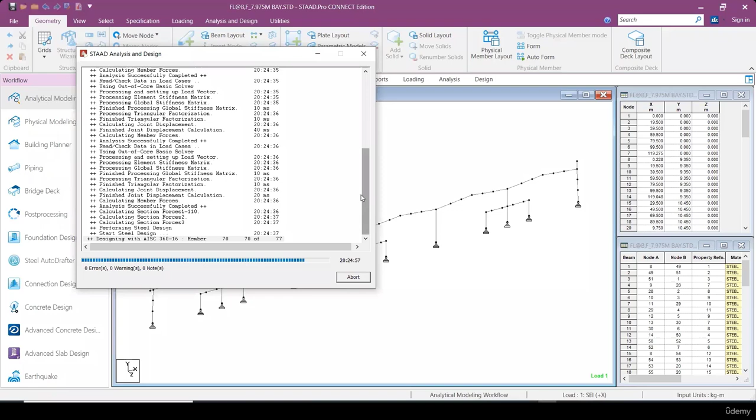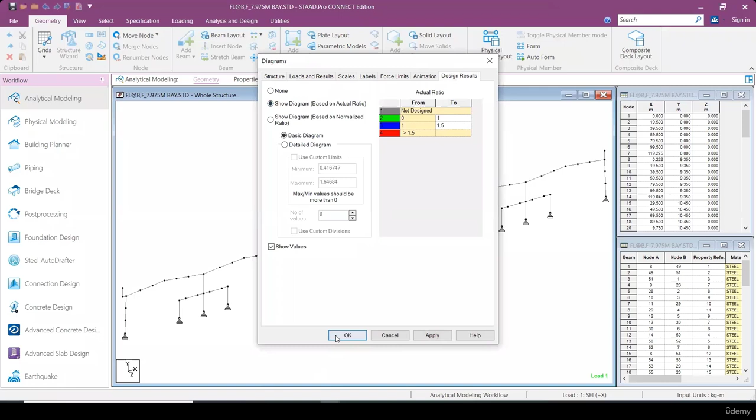Okay, if you right click here, you can see structural diagrams. There are several methods available. If you right click here, the structural diagrams option is available. In that, the design results portion is there. If you click show diagram based on actual ratio, this is called the unity check ratio. If you click OK, then you can see 1.25, 1.24.

I have taken this example because if you see here, all these rafters have failed, right? Ratios are more than one, so it has failed actually. But if you check this frame in a licensed version, it has passed. That is why I am advising to use the licensed version whenever possible. If there is no possibility, we cannot do anything. But I checked this frame in the licensed STAAD version, and it passed all the members.

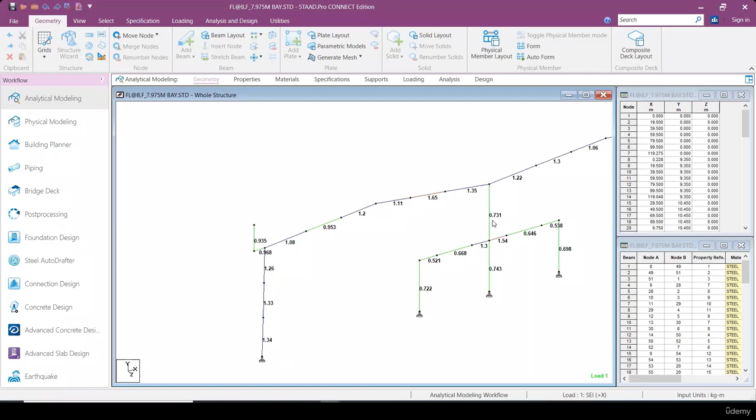Why, I don't know. There is some problem in the cracked version. Okay, so I'm advising all this. The other thing, you can check unity ratios in the post-processing mode. If you go to post-processing mode and click OK here, there is a direct option, utilization ratio. If you uncheck displacement, you can see the unity check ratio. So this is all about it. Is your doubt clear? Okay, sir. Thank you, sir.